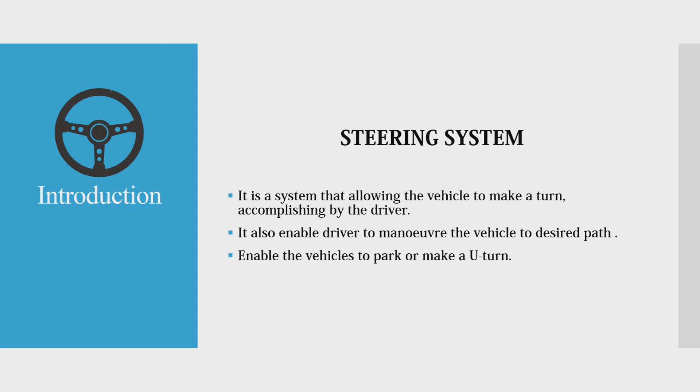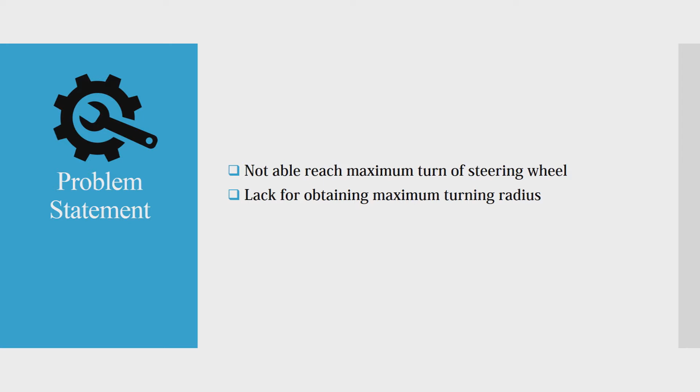Problem statement. The current issue is that the steering is not able to reach the maximum turns of the steering wheel as the driver desires to make a turn. And the second one is the steering system is lacking in obtaining the maximum radius. The objective of the project is to design a new steering system for the Shell Eco Marathon vehicle. And the second objective is to analyze the steering performance of the new steering system design.

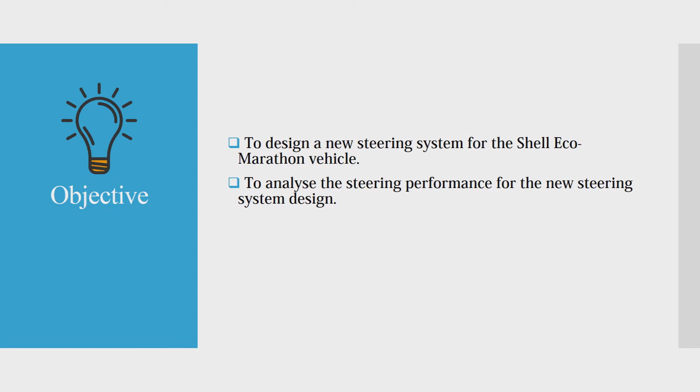So go on with the scope of the project. First, we start with the benchmarking design, and second we go for the concept design. The third one is to analyze the steering performance of the new concept design using a simulation. And the last one is to interpret the results obtained from the simulation and make a conclusion on the project.

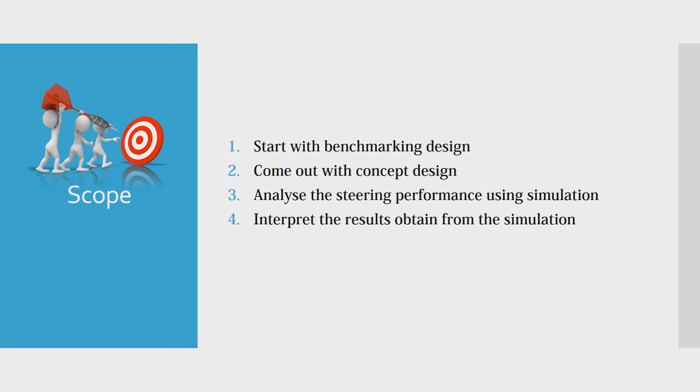Next, we go to the literature review. We start with the Shell Eco Marathon. As we know, Shell Eco Marathon is a competition for engineering students to build a car or any type of vehicle that is powered by an electric battery. It is for approaching the new future technology of car development, and it's a worldwide competition. There is a Europe competition, and now there is one for Asia.

This project is purposely to create or build an urban car. An urban car is a compact, small size car which is suitable for a city ride. For Shell Eco Marathon, the objective is to develop new ideas and innovation from the young generation of engineers.

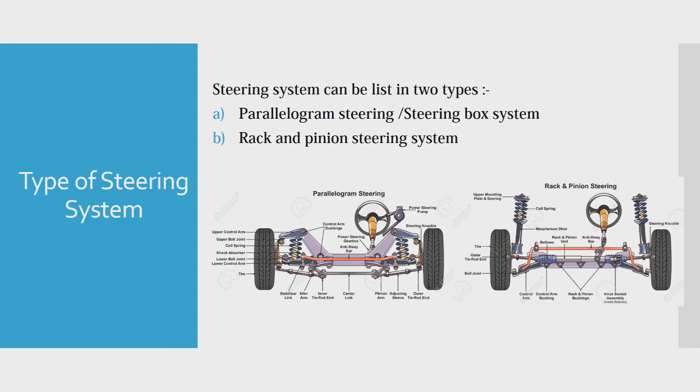Next is the type of steering system. Steering systems can be listed into two types: the parallelogram steering or steering box system, and the rack and pinion steering system. The parallelogram steering system is mostly used in heavy trucks or light trucks, while the rack and pinion steering system is mostly used in small vehicles like cars.

Next is the type of linkage. There are two types of linkage. First is the parallelogram linkage. This linkage is mostly used in passenger vehicles or light or heavy trucks, as I said before. It is more suitable for heavy trucks because they have a bigger vehicle body.

This type of linkage is more complicated than a rack and pinion. It is also controlled by a pitman arm to transfer the movement from the steering box to the center link. When the steering wheel makes a turn, the pitman arm will transfer the movement to the center link. And the second one is the rack and pinion linkage.

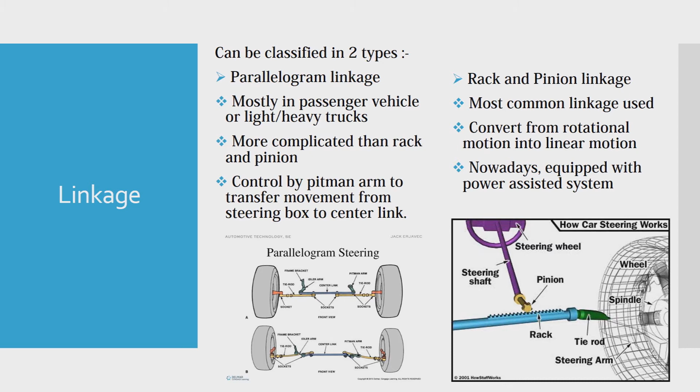This type of linkage is the most common linkage used in cars. The mechanism converts the rotational motion from the steering wheel into the linear motion of the rack and pinion. As the pinion rotates to the left or right, the rack will move the tie rod that links with the steering arm to the wheel, so they can make a turn to the left or to the right. Nowadays, this system is equipped with a power assist system, which makes it easy for the driver to make a turn. Next is the turning radius.

Turning radius is the dimension or diameter of the smallest circle when a car makes a turn. It also provides an idea of how much space a specific vehicle requires to turn. For example, when the car wants to make a turn, the radius is from the center of rotation to the center of the car, so that they can make a full 360-degree rotation, or any smaller circle you want to make.

It can also be calculated using the Ackermann equation. From this picture we can see that to calculate it, we have to gather the width of the car and the wheelbase. We also have to find the inner and outer steer angles of the wheels, so that after we gather all this information, we can calculate the turning radius, which is denoted as R.

So after finding the turning radius, we can determine how much the steering wheel needs to turn so that the car will turn to the desired path.

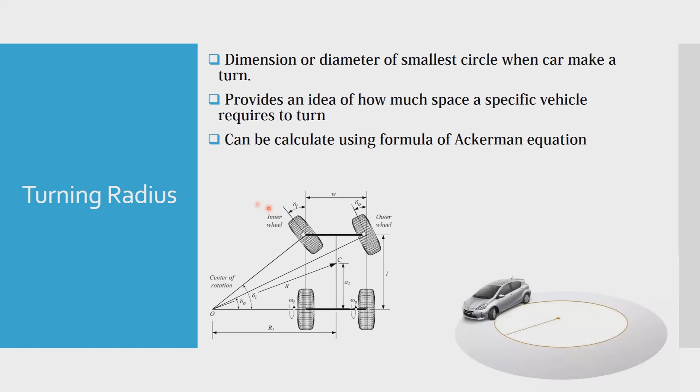Next is the methodology. The first step of the methodology starts with benchmarking. Benchmarking is to gather information on steering system performance, where we have to research the steering design and the details of the design. For this project, I have benchmarked my design to the rack and pinion steering system because it is suitable for the Shell Eco-marathon car and is the most common system used nowadays. In this section, I also have to set the adjustments on the details of the steering system.

Next is concept design. Concept design is to prepare several designs, which I prepare theoretically using calculation. Once I gather the designs, I have to compare the details of each design, so that the modifications I have made are not too big or too small. Next, I have to discuss the modifications on the new design, where I have to make a conclusion for the design I want.

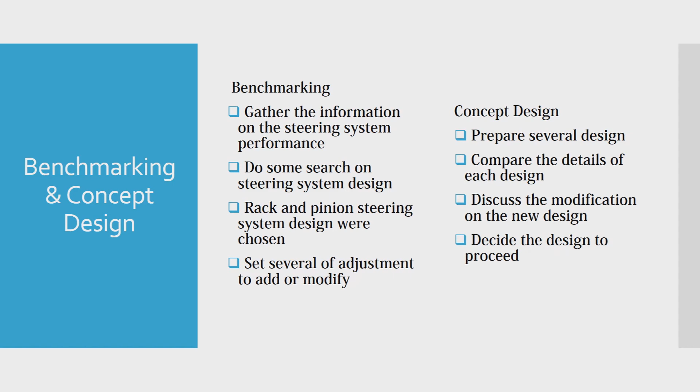Next is the design. In the design process, I design the rack and pinion in software. The software I use is MSC Adams, which already provides a rack and pinion steering system, so I can use it and I am able to change the hard points of the design. With the hard points, I can change the steer angle of the wheel. I can change the length of the rack, or where I want to place the pinion, maybe in the center or on the left or right.

Next, we proceed to the analysis. For the analysis, I have to create a suspension system before proceeding to the assembly. Once I have created it, I will assemble it with the steering system I have chosen. Then I will run the analysis using a steering analysis simulation. After analyzing with the simulation, I have to plot a graph to gather the data from the simulation.

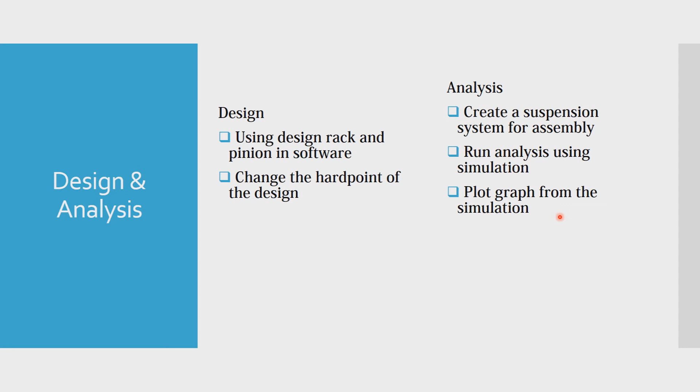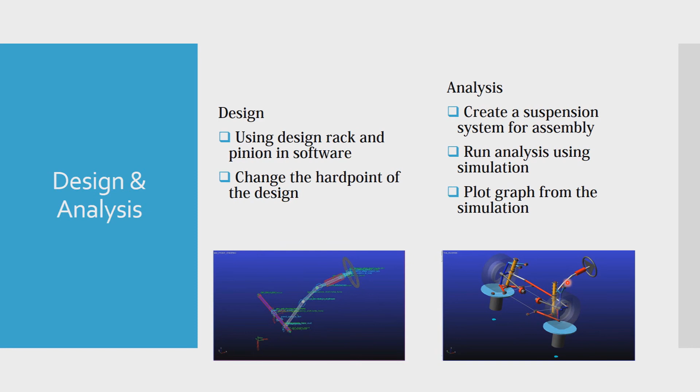So this is a sample of the design I use, a rack and pinion system, and this is a sample of the assembly, which is a double wishbone suspension, and this is my design of the steering.

This is the result. In the results section, I will interpret the results gained from the simulation, where I gather the turning radius, the steer angle, and the displacement of the steering. Next, I have to compare the data with results already obtained by other engineers. Then I have to discuss the results so that there are no errors in my design. If there is an error, I have to redesign the steering system so that it meets the requirements I want.

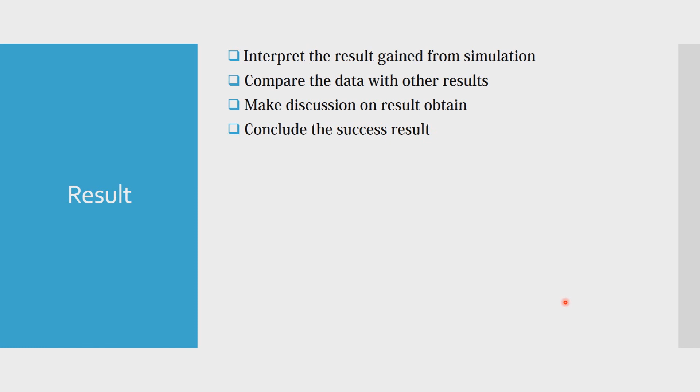This project aims at the improvement of steering performance using a new design approach. By doing this project, new ideas for the steering system can be obtained, so that the possibility of having a problem with the steering system can be minimized, approaching a great steering system. Thus, this project mainly aims to gather new designs so that they can be implemented in new cars. So that's all from me.